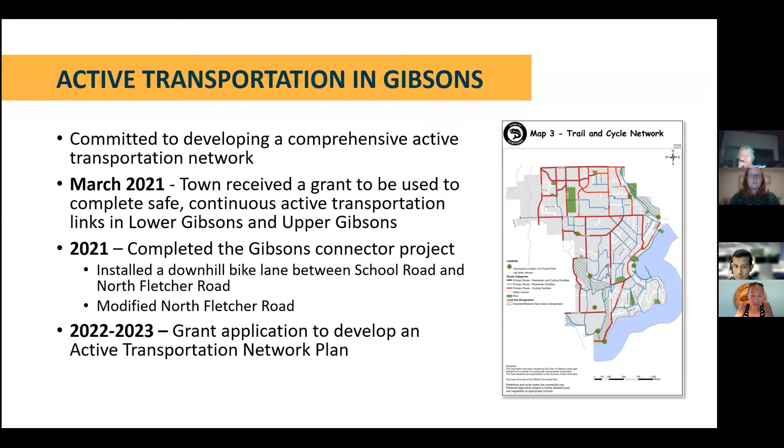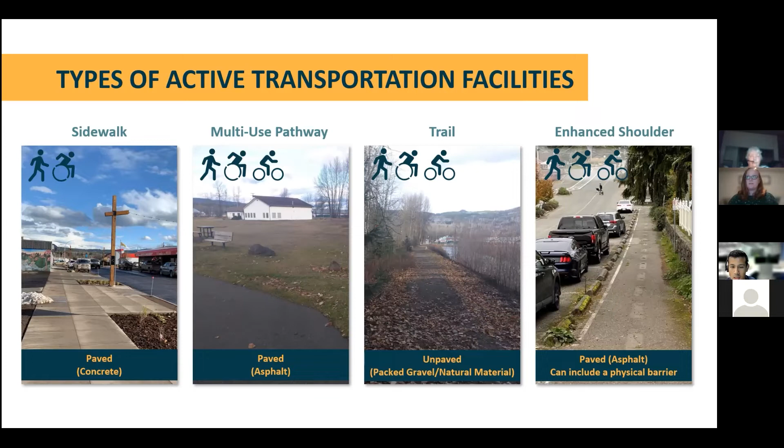As well as enhanced shoulders for areas that don't have a formalized sidewalk network or facility. So we recognize that these are found around the town, but we also recognize there are gaps in the network. That's why we're actively working with the town to look into improving and addressing these gaps and provide a more comprehensive network for everybody.

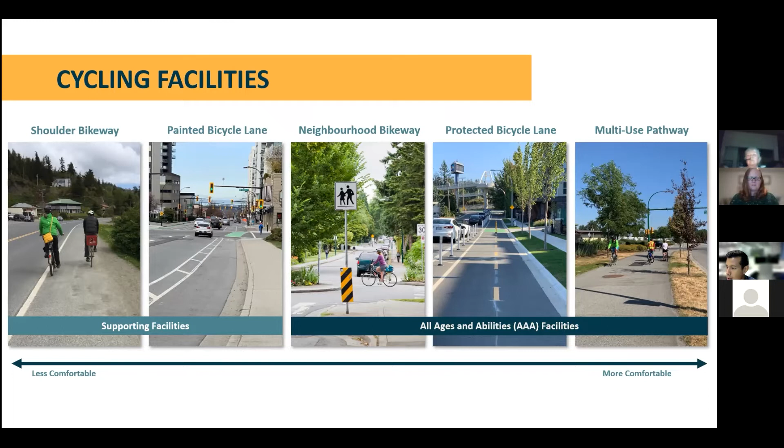Hopefully this gives a good background and understanding for our workshop later on, as we consider what might be appropriate, what might be desired in your perspective for the corridors that we're looking at today. With that, I will pass it over to Robbie to introduce what traffic calming is.

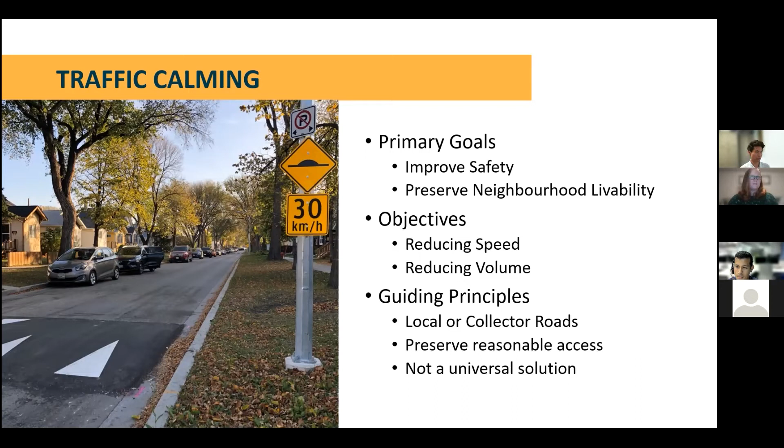So to go through a couple of traffic calming treatments, we want to introduce everyone here today to a couple of different categories of traffic calming treatments. By no means are these exhaustive categories or exhaustive treatments. There are a number of treatments out there that aren't included here, but these ones are chosen specifically for the context of Gibsons. Obviously, if there are any that are not included in these categories or specific treatments that anyone wants to bring up later in our discussion groups, we encourage that discussion as well.

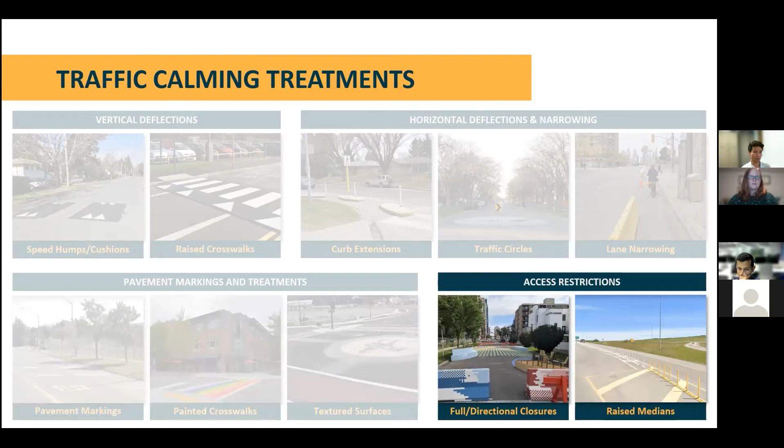Finally, we have access restrictions here at the bottom right. That can take the form of a full or directional closure, or raised medians, which a lot of the time are used to delineate protected bike lanes along a specific corridor with road users.

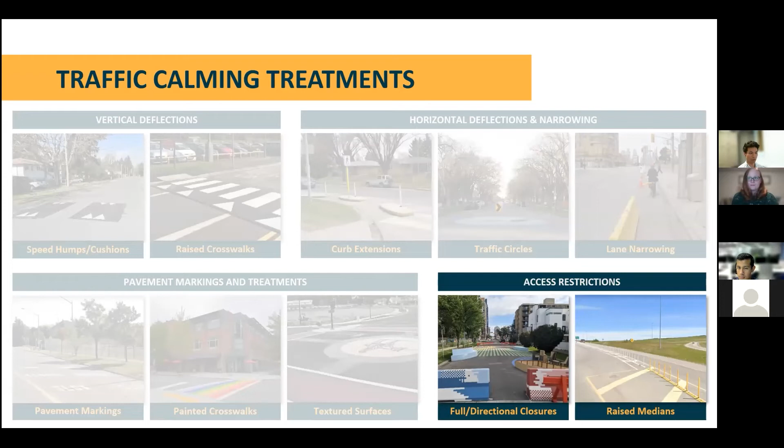As many of you know, this is one of the temporary measures that was implemented along Glassford back in July of 2021. We'll touch on that a little bit more when we get to the introductions for Glassford and Gower Point, about some of the details around that closure, and hopefully with that closure it sparks some inspiration for discussion later on when we get to our discussion groups.

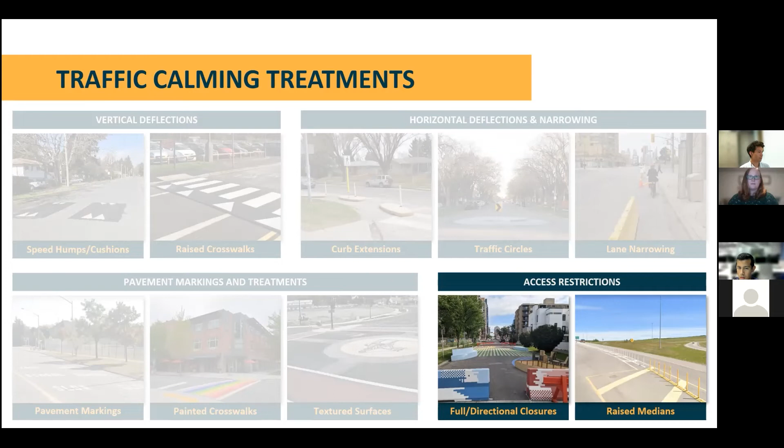All right, thanks, Robbie.

With that in mind, I know there's a lot of information that's just been shared, so when we go through the workshop session, we will revisit some of those things. It will be up in front and center for everyone for discussion, so don't feel like you need to remember everything right now. But we're going to move into more of the workshop component of this session. Before we get into the actual collaborative component, we will first give a bit of background to the two corridors that we are discussing today.

Sure, these aren't brand new to all of you either. So first of all, Gower Point Road. The section of Gower Point Road we're looking at today is between Alder Springs, technically to South Fletcher, because it turns into Sharman Creek, Sharman Road further west, but we've included that segment as well, as you can see in the next slide. This section of Gower Point Road is designated as a collector road in the town's OCP, so it's not quite a local road.

So it is kind of designed to take on more volume than a local road, and it's also designed more for traffic movement, like goods and people movement. It's also a key connection for Lower Gibsons.

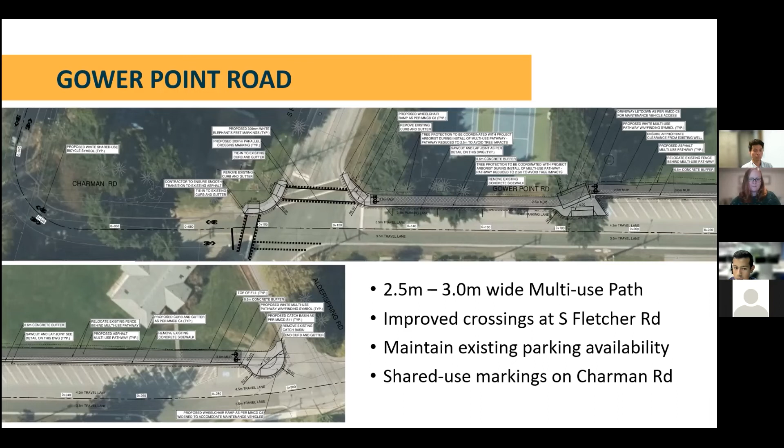In the next component of this session, we will have a chance to gather your inputs on the design. And I'll pass it over to Robbie for Glassford.

Thanks, Fujio. For all those listening, we'll get into it a little bit more detail when we get to the discussion portion of the workshop. But everyone here will have an opportunity to provide input both on Gower Point as well as Glassford. So we just want to make sure that we're focusing our efforts on gaining feedback on these two pieces.

So Glassford Road, same as Gower Point Road, I'm sure a lot of you are familiar with the corridor, is a local road designation and is a connecting portion between Gower Point Road. This portion of Glassford has garnered lots of feedback from the community to the town, and was one of the driving factors behind the town engaging Urban and running this session today.

So for those that are unfamiliar, Glassford is a really wide, unmarked street. It really has enough width to provide room for two opposing vehicles coming and going through the street. The street itself has no sidewalks or curbs and has fairly large gravel shoulders on each side. The local road designation gives it a natural designation for neighborhood bikeways and traffic calming, which are two of the measures that we mentioned earlier in the active transportation and traffic calming portions of the presentation.

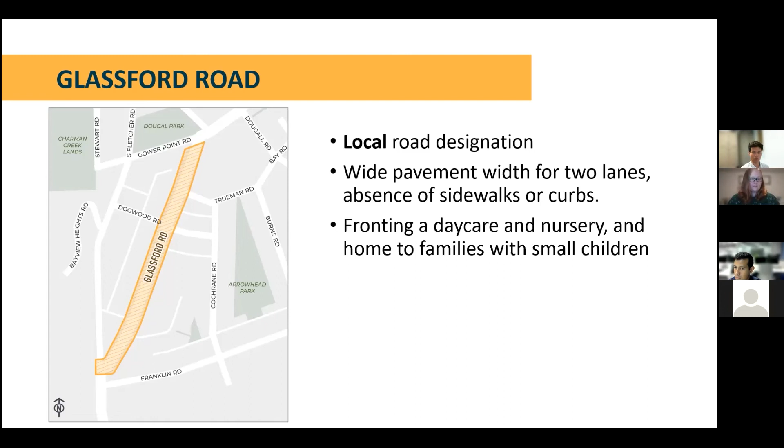So again, like I mentioned, Glassford Road has gone through a couple of iterations and a number of feedback rounds from the community. Back in 2021 and earlier this year, the town did some engagement with the corridor and local residents on Glassford Road. In July of 2021, the town implemented a temporary closure introduced initially at Plain Lane, coupled with a couple of vehicle volume data collection exercises. Then in June of this year, the temporary closure was moved north of Plain Lane.

On the closures themselves, the town acknowledges that they've gotten back a lot of feedback from the community. The original traffic closure was planned as a 6-month trial, and based on feedback and some of the traffic data that was collected, again this year, the temporary closure was moved north of Blaine.

And really, the town is looking at Glassford as a bit of a clean slate. They're hoping to use the feedback gained today to mold the solutions they want to implement moving forward. So there's no real restriction in terms of whether the treatment needs to be a closure or a neighborhood bikeway. The town is open to all feedback and all ideas from the people that live on the corridor, as well as members of the community.